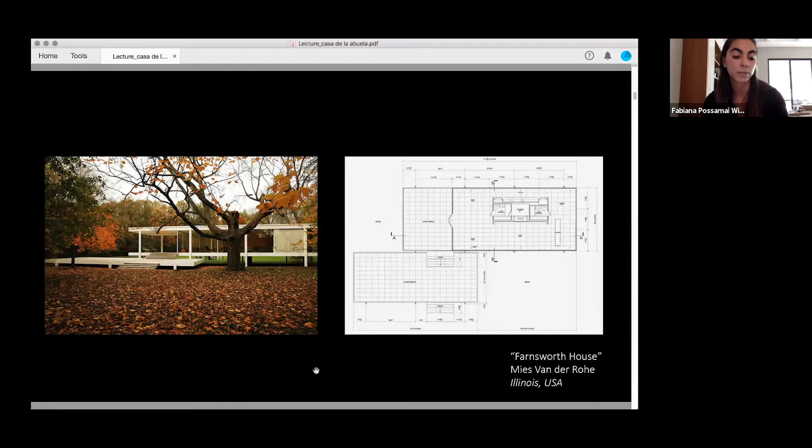This is something very particular to a house. It is very personal, and it requires a special understanding of the dynamics of the family, their friends, and even the rest of the community where they are inserted.

For architects, the concepts of house, home, and habitat are inevitably interconnected. They merge to cover a vast territory in which you can fit many different scales, solutions, and circumstances.

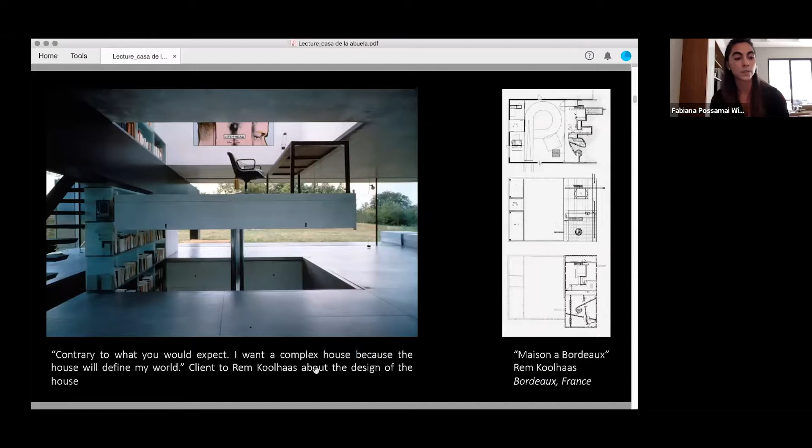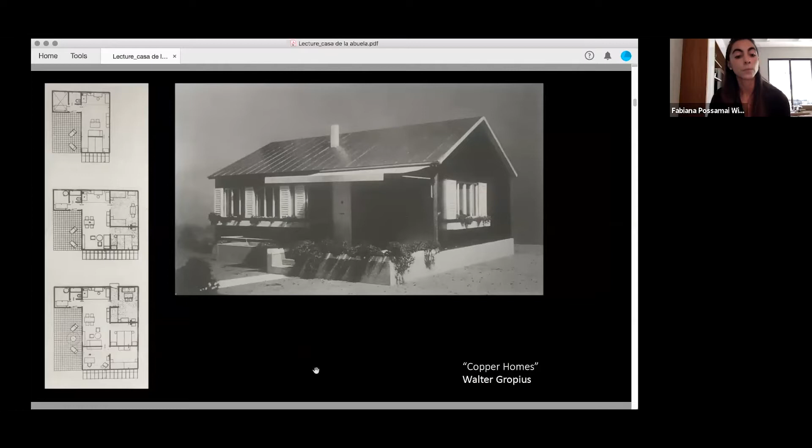For the non-architect population, the idea of the house has always been linked to a series of spaces, activities, and services: bedrooms, bathroom, kitchen, etc. Or even a predetermined image, more or less traditional, consisting of an enclosed volume with roof, windows, walls, and doors.

Depending on its cultural period, the house has a form, a materiality, a size, in the collective memory, and every non-architect recognizes without much thought what a house is, and therefore what it isn't.

In the architectural sphere, on the other hand, the house is not only an inhabitable building with a recognizable form, but it is also, in a real sense, and not only metaphorically, a safe place suited for life.

This brings me to Webster's second definition of house: a shelter or refuge, such as a nest or den of a wild animal. A natural covering, such as a test or shell that encloses and protects an animal or a colony of sorts. A building in which something is sheltered or stored.

That sensation of shelter and safety is a fundamental component of the collective idea of a house. But there are dualities at play that are present at all times. The house cannot be conceived as an enclosed fortress absorbed in itself.

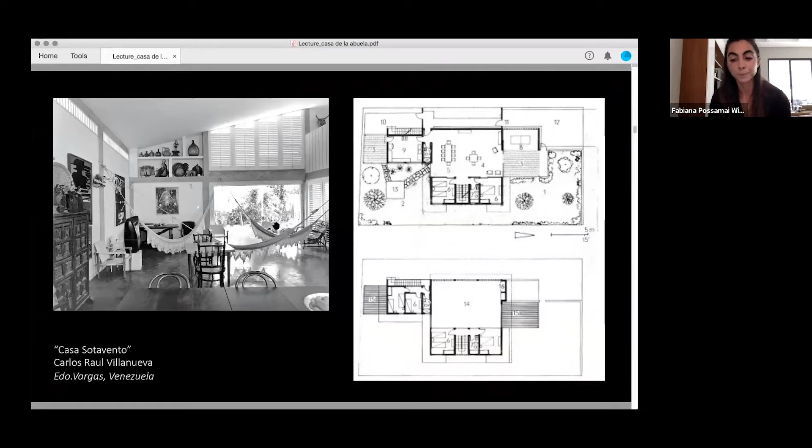The house was commissioned by my grandmother, who is originally from this region, so she understood well the conditions of the area. She grew up in a traditional colonial house with gable tile roofs and a patio, so this influenced the kind of house she envisioned to have.

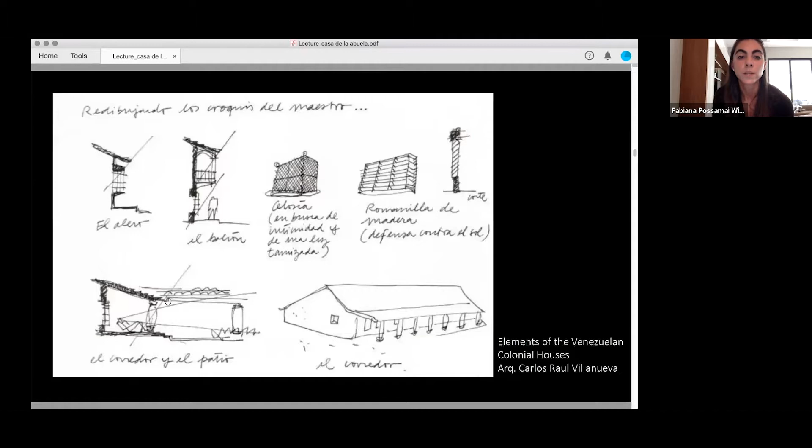This is, again, Carlos Raúl Villanueva with the Casa Sotavento, where we can see these relationships happen between the exterior and interior. So we see some of these components, even from the analysis he does from colonial architecture, translated later into one of his houses.

We can see how these values have been part of the exploration and study of many Venezuelan architects, and how they have achieved to produce spaces with these qualities.

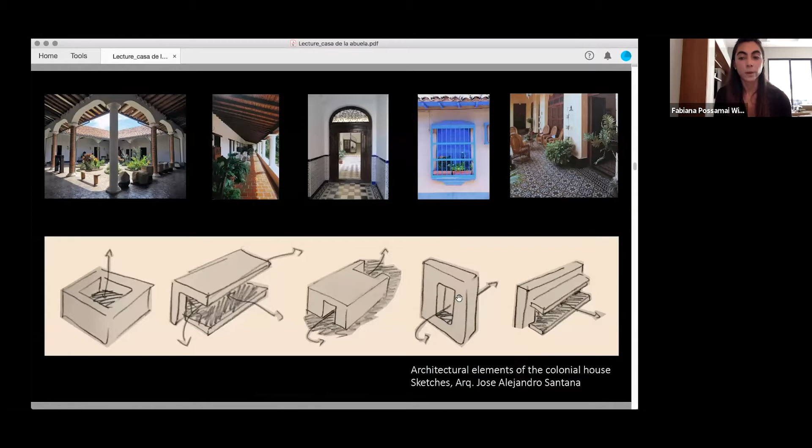After analyzing the colonial houses in Venezuela, we identified five types of traditional spaces that are constant and crucial in the composition of the space: the patio, the corridor, the zaguán or hallway, the window, and the porch. Each one of them is simultaneously a space, a form, and a place.

To design a house using colonial architectural elements, we initially experimented with placing the predetermined form of a perfect square on the site, which did not adapt or recognize the particularities of the lot and the place. This is the lot, and when we place the typical form of the square to generate that patio, it did not have much relationship with the existing lot and site.

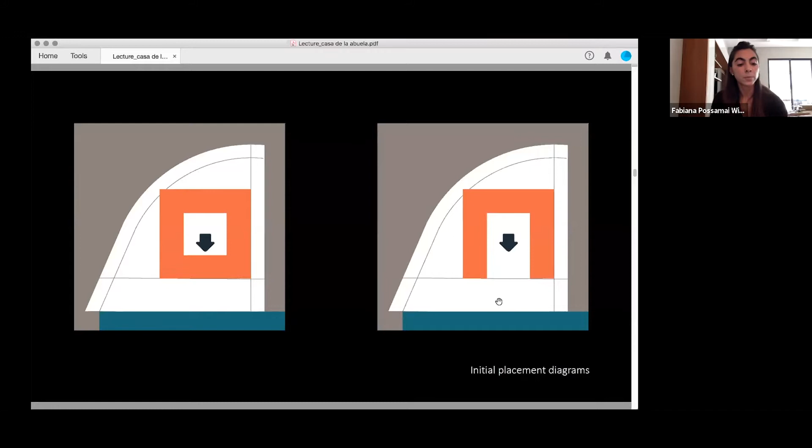We decided to open that square towards the water, and then immediately began to manipulate the essential form to adjust it to the circumstantial conditions of the site.

We arranged one of the sides of the square tangential to the curve of the lot, which allowed us to gain more area in order to meet the requirements of space that the client demanded. So this side shifted to adapt to this condition, and that allowed for this volume to be much larger.

As part of the request, we needed to solve the program on one story to facilitate movement throughout the house, since my grandmother knew she would not be able to climb stairs on her own as time went by.

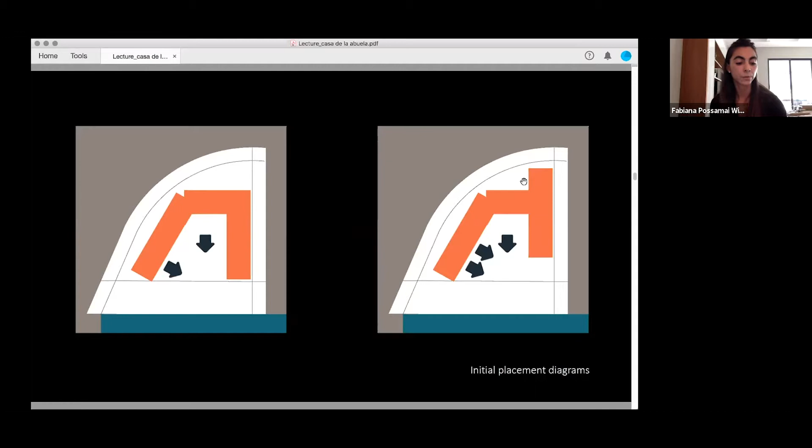This defined from the beginning the separation of the program into two very clear volumes, one for social and one for intimate areas, as we see here. This would be the social volume, and this is the one for the intimate areas. The two were linked together through a unifying roof that housed them all.

The development of the roof arose from repeating the strategy of the indigenous Shabono, which, with a single section extruded around a circle, forms in a single operation the entire building. So this is the Shabono, and as you can see, the building is basically formed by the entire roof, which is one single form, behaving as a single structure, wall and roof at the same time.

In this case, we apply that principle to a regular section, allowing the roof to act as an element that articulates the entire house, while the structure and walls adapt more freely, responding to particular aesthetic, functional, and local conditions. So you can see here the resemblance to that condition of the Shabono, having a unifying roof.

The Shabono is the collective housing of the Yanomami Aboriginal in the Venezuelan Amazon. It is composed of a ring that creates an inhabitable space. To the outside of the ring, it acts like a barrier from the vegetation and the wildlife. Towards the interior, it is an open and communal space that is covered and protected from the elements.

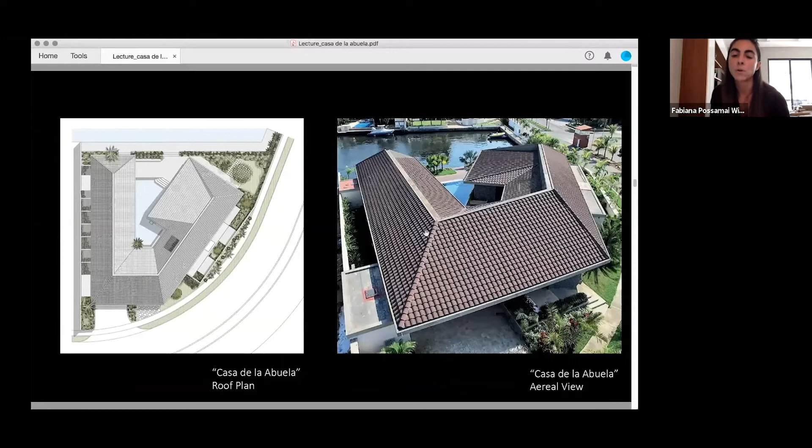is located, and reflecting the sky and the house itself onto the exterior. So we located the pool in the center where the patio was, and the pool was given by the resulting shape of the footprint of the house.

This presented at the beginning the challenge of how we would be able to build the pool on site. The thing is, in Venezuela, because we have seismic conditions, we have earthquakes, it was suggested that we poured the floor plate on a single solid slab, so we could give it a floating condition. And so in the case of an earthquake, we wouldn't have active breakage points on the slab.

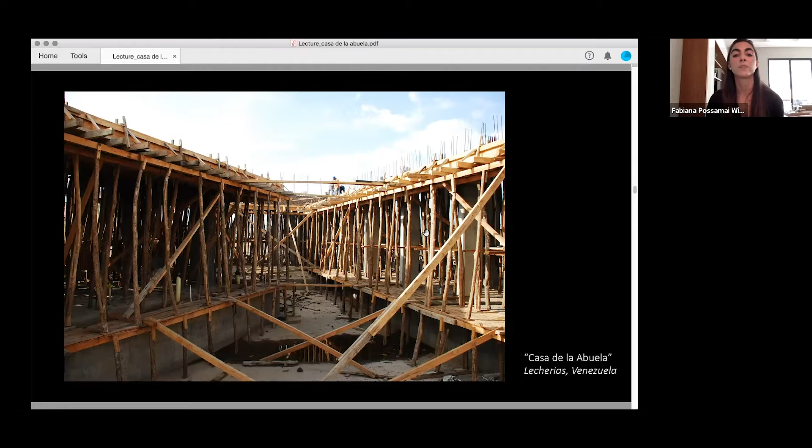But the pool could not be poured at the same time as the structural slab for the entire house. So actually it is very special that the pool acted as a symbolic element to interpret water as a morphing element of the place, but it was also a morphing element from the beginning in our construction site. The pool itself was cast from the beginning. It was the first piece that was cast and poured on the site. Here you see the site when it was empty, and the pool was, let's say, the originator piece for the entire house to be built.

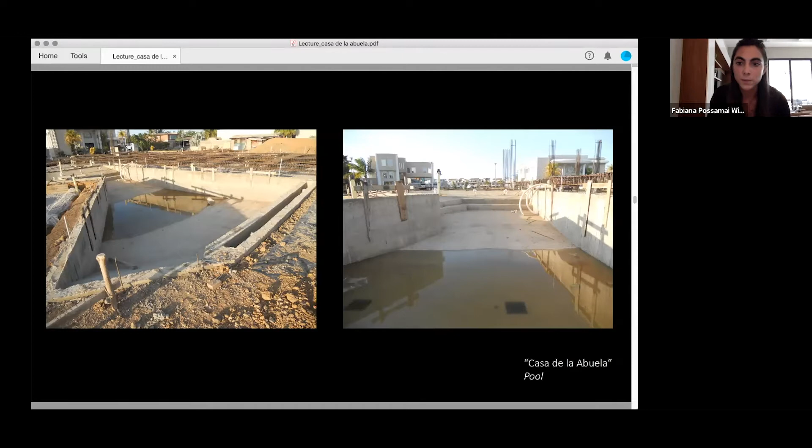This was mainly due to the fact that the slab had to have some joints in between them and the pool for it to act structurally and not break in the case of an earthquake. Here you can see some of the slab already being integrated into the site, and the pool was already finished.

Some of the images then show all of the work that goes on to build the slab, which is then placed around the pool as a resulting system. Here is very interesting because you can see all of that work being done in place as the process went by.

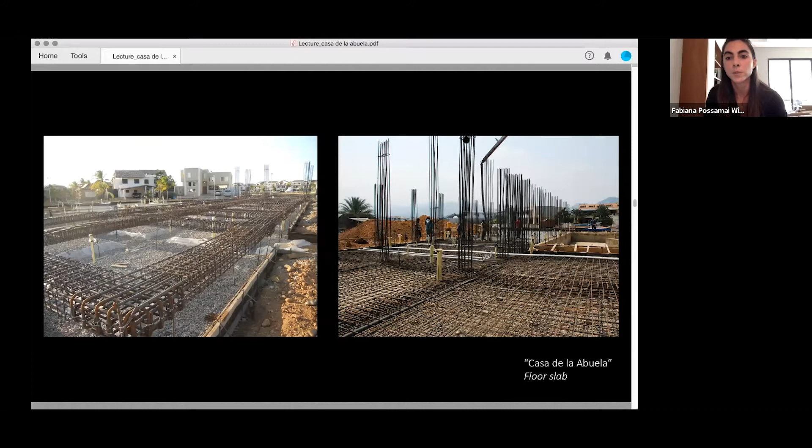All of the rebar that you have to set in place before you pour the concrete is what you see over here, so it would be possible afterwards to tie along the columns and the structural system to the existing slab. Since the slab needed to be poured in a single operation, or let's say on a single day, because of its condition of being a solid slab, we had to resort to bringing a full truck of concrete. It wasn't possible to just mix a piece, pour it, and then continue pouring in phases. So this was a full day's work.

We had a lot of personnel on site, and we were pouring the slab at the same time that there were people already leveling it out. It was a very interesting process to see because of the conditions of the area. It is very warm and very hot, a little bit like in Florida. The slab needed to be constantly watered so it wouldn't dry and crack before the concrete could set itself.

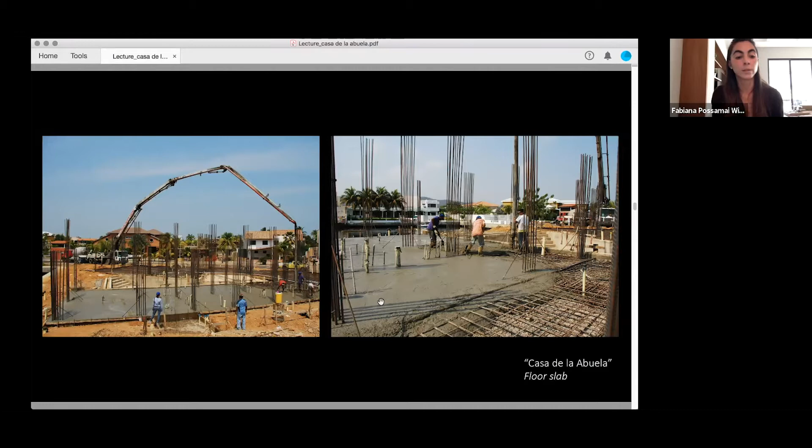Eventually, after that process was done, we could see how those columns begin to take form on top of the slab. Some of the columns, and I will explain later why this is, have a more specific detail, and some of them look a little bit more smooth. They don't have this detail. We will explain that in a little bit.

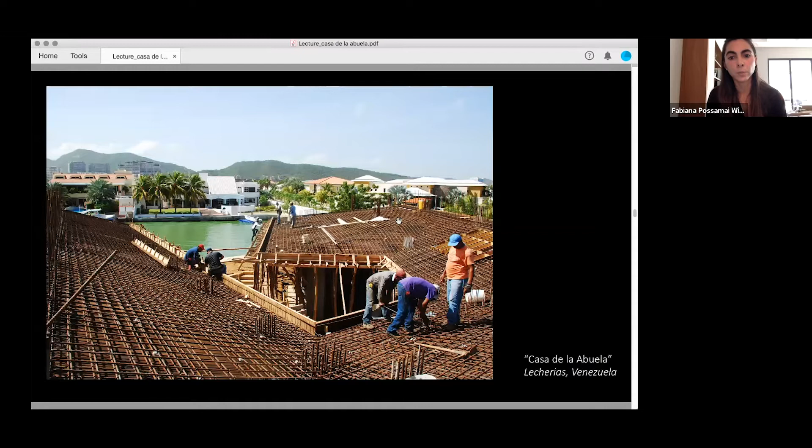And this is how it would look from the roof. Going back to the Shabono, it had that circle from the top, which emerged from that resulting form of the void or of the common space. Here is the same: the void is given by the resulting space of the patio, which in this case is taken by the pool.

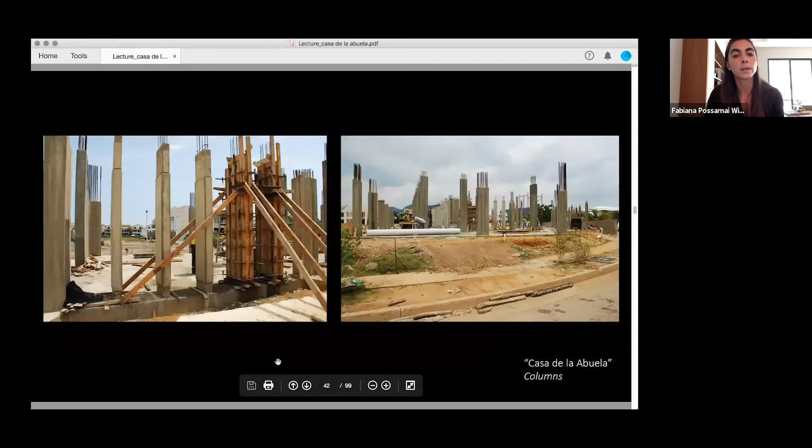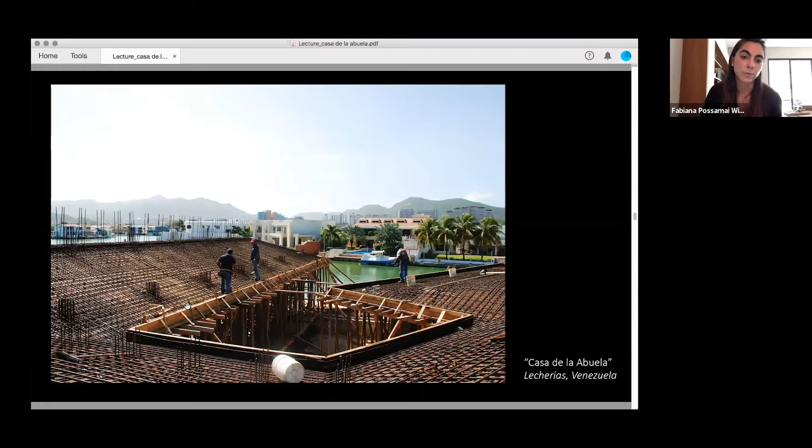So when you see the pool back in the image that we saw here, it kind of reflects the space that the roof leaves behind after hugging the entire house. This is part of the process to put together the roof as that resulting space. And some images.

After defining all of these elements, the resulting scheme allowed us to comply with the areas required for the program and solve it entirely on one story.

The house opens towards the canal to allow for the views. This is the lot, and we are on an interior canal, which only allowed us some views towards some hills on the back of the city, and then eventually towards the neighborhoods that are around and other canals.

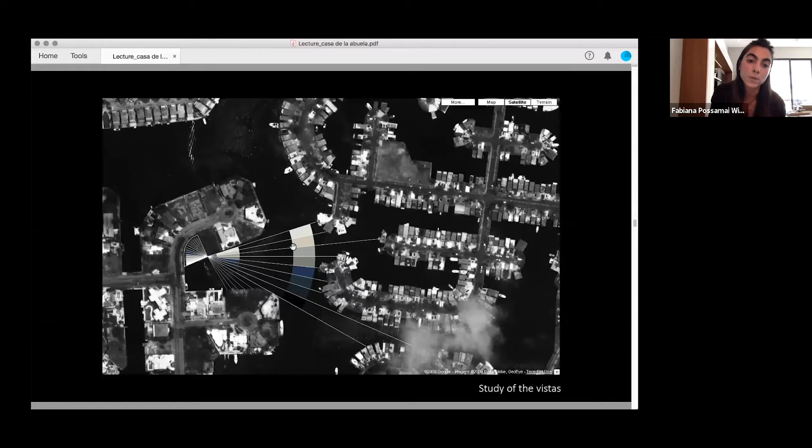So we realized after making this study that the most favorable views, the ones shown in this lighter color, towards these hills and towards where the canal opens, was the area that we wanted to set for the social spaces.

So the area for social activities is placed parallel to the street, to gain length and give these social spaces the best vistas, and project eventually this porch towards the garden and the canals.

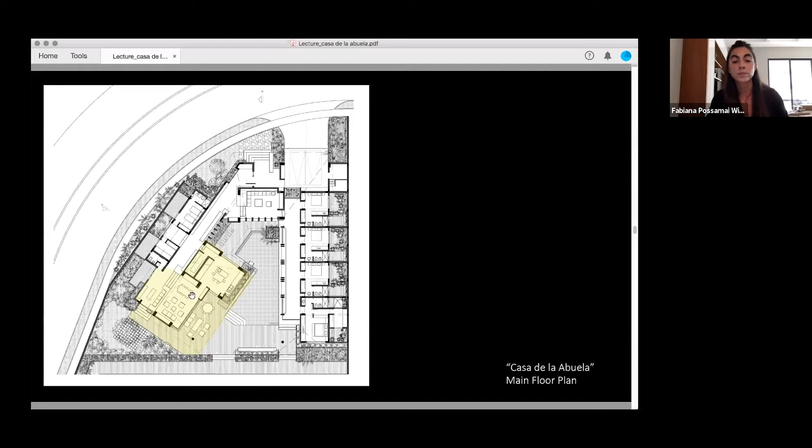So you can see here how that area is the one that is directly pointing, in the analysis, towards those hills. The porch is the place where my grandmother, in her daily activities, hosts friends. So this area of the house was very important for her, since this is an activity she does daily.

So the porch was located in the place of the lot with the best visual record of the daily activities of the waterways and the views.

All the social spaces enjoy the location that can participate to a greater degree in that particular life of the canals, marked by the motion of the boats that come and go throughout the day. It is very interesting to sit here throughout the day because you see all of the activity that goes on in the community. So it was very important for us to establish that connection from the beginning.

The bedrooms are located in a continuous volume to the east, parallel to the boundary, and having less possibility for interesting views of the surroundings, they face small side patios that act as landscapes of an intimate scale.

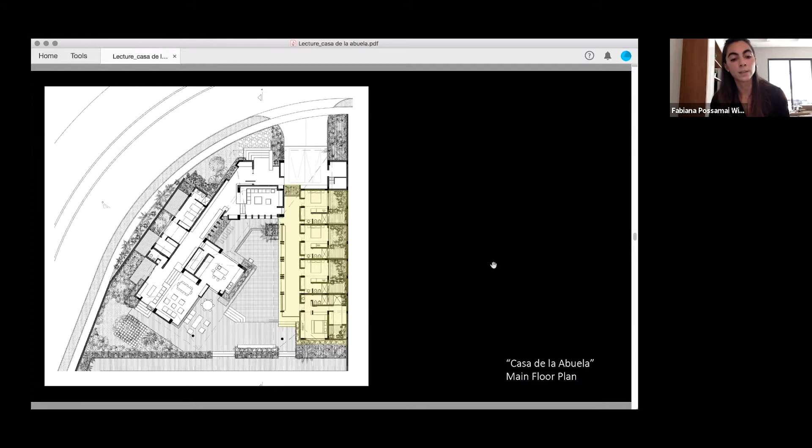Different from the other areas in the house, they are designed for rest and isolation. So initially we intended to have the bedrooms towards some patios, and originally these were conceived more open.

We knew from the beginning that the rooms were going to face a boundary wall. So we didn't like that condition so much, having bedrooms that, although we wanted to give them privacy, would have to face a wall.

So from the beginning, we conceived the idea of having small patios that were more intimate for each room. As we went along with the construction, we faced reality and the situation of insecurity in the area.

So the client pointed out that after we build the boundary wall, which has a certain height but is not completely or super tall, it would be like a small wall, we would still have the complication of people entering through the wall into the bedrooms, and that situation being very insecure.

So that's when the idea of the pergola came in. In a way, the pergola acts as a climate regulator or a light regulator element, but at the same time, it secured the space from the top, and it allowed those bedrooms to have a different quality within those patios.

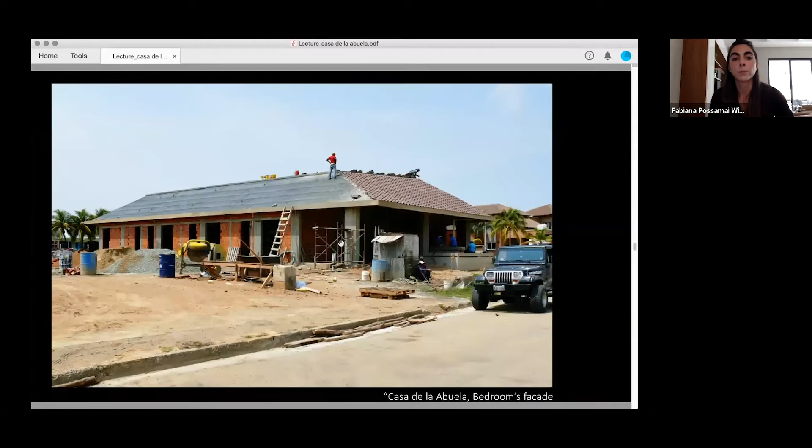So during the development of that facade, we were thinking a lot about the rhythm of the windows and the relationship with the exterior, but that ultimate decision of having the pergola is kind of the consequence of analyzing the realities of the site.

And for us, it was one of those good surprises, which eventually I want to point out: all of the things that we had to modify because of security circumstances of the area, or because of the local particularities, were actually to the benefit of the house.

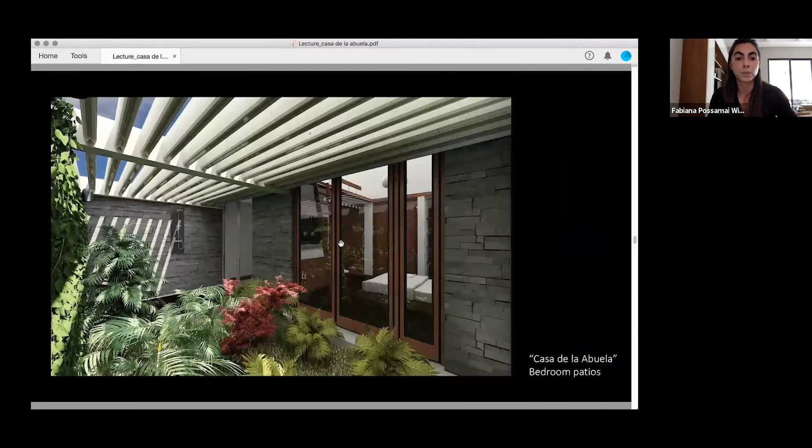Nothing that was eventually imposed on us because of the realities of Venezuela, and specifically the realities of this town, was ever a problem in the moment we had to face with these changes during the design process and construction. Eventually this rendered a better result, allowing for these patios to have a much better condition and the pergola.

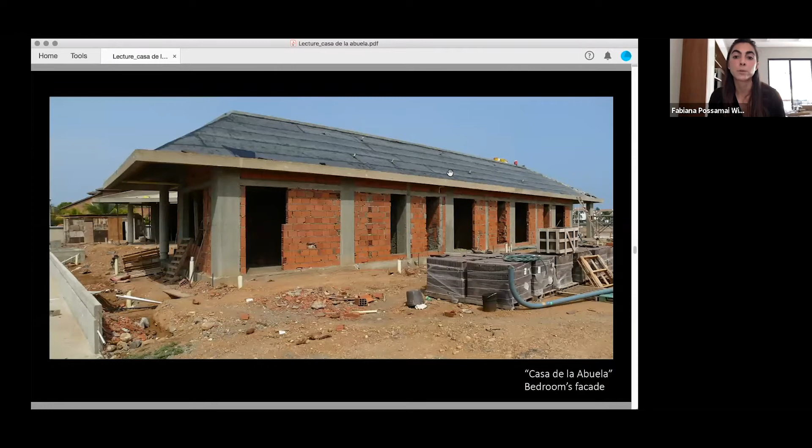And it allowed the client to have the security in this facade that he was intending to have. This is part of the process of building that facade, which right now you can perceive because you don't have the boundary wall. But it's curious that after that, it's a facade of the house you really don't perceive at all—it's something you live from the bedroom in a more intimate scale.

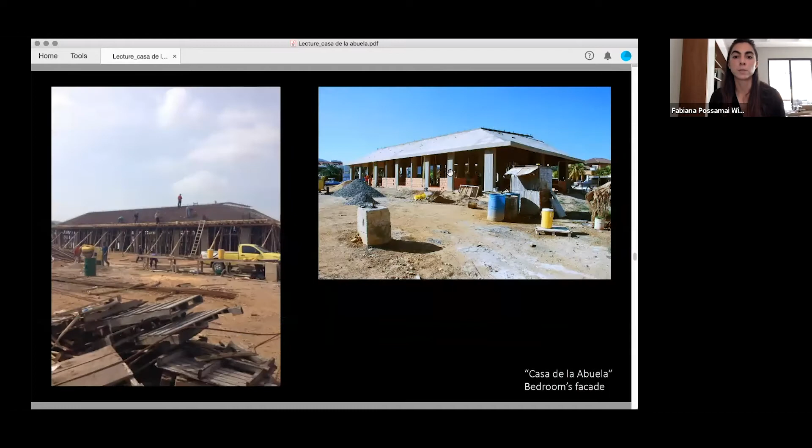On the other hand, the corridor serves as a connector, allowing movement between the bedrooms, and it is the space of intermediation between them and the central patio. This corridor on the other facade for the volume of bedrooms also had a very particular situation in terms of security. The canals are to the front, or south, of the site.

The security problem was that this corridor was completely open. We always wanted to recreate that colonial corridor and establish that relationship with the outside—we imagined people coming out of their bedrooms and jumping into the pool. So it was very hard for us when the client said the corridor needed to be closed, because anyone could come on a boat from the canals and enter the most intimate or private areas of the house, which were the bedrooms. That was a security problem we had not thought of when we designed the house.

At first, when we thought of closing the corridor, it was like, okay, we lost the space. A corridor that is enclosed is not really a corridor—it's just going to be circulation space, and it's not going to have the spatial qualities we were trying to recreate from the colonial architecture.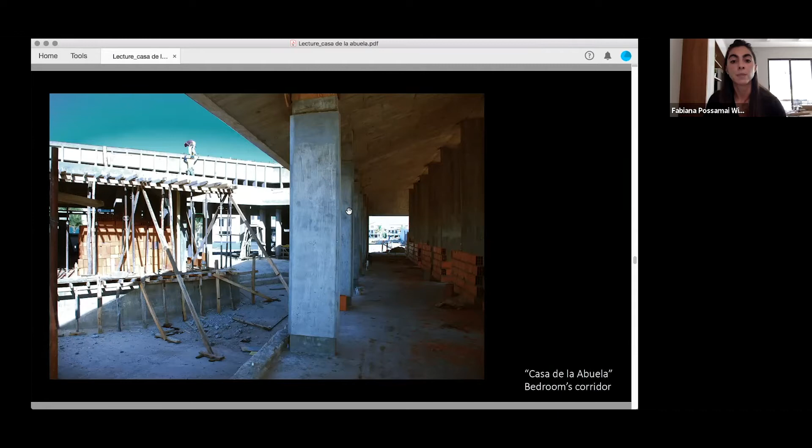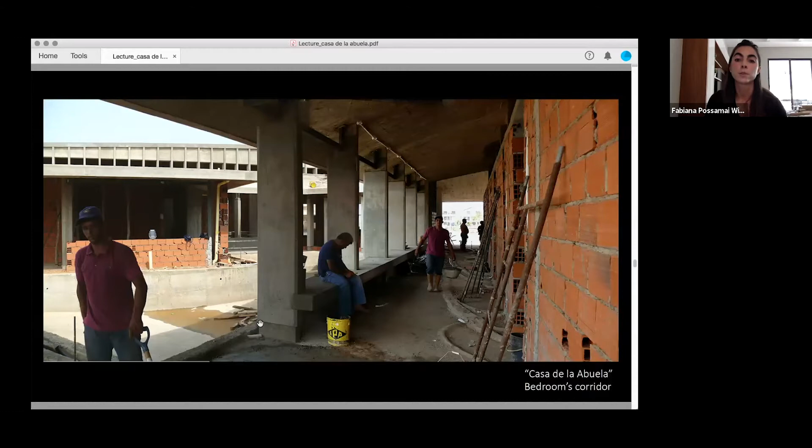But then again, these constraints became an opportunity to rethink the space and redesign it, and this is when we thought of including a low bench. It seems like a very simple operation, but the low bench allowed us to establish an enclosed relationship for the corridor, thought of with the same spatial qualities that could live towards the outside areas.

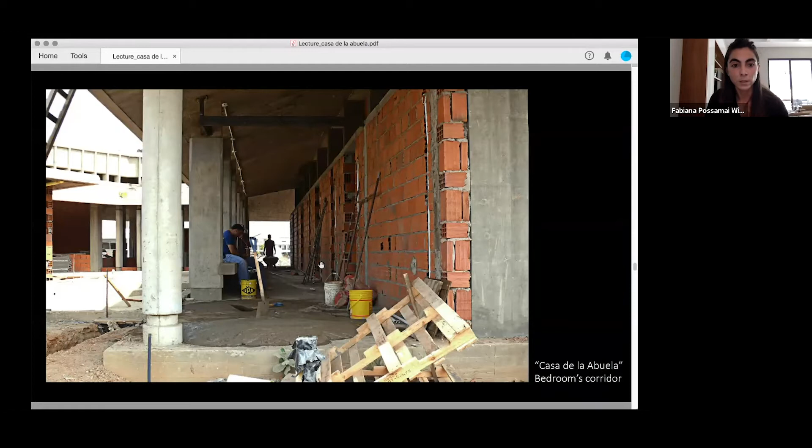And eventually you could allow the corridor to still have relationships with the outside, but at the same time it would allow us to rethink the possibility of having elements that would close in between one column and the other.

This area was always thought of as a space that would live towards the pool and could also be used to sleep in hammocks. So we wanted to extend the intimate activity of the bedrooms to that intermediate area, for people to gather and socialize in a different way in this space.

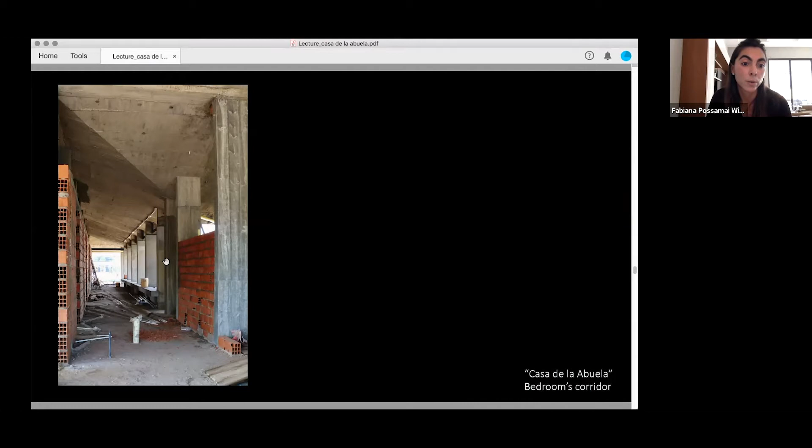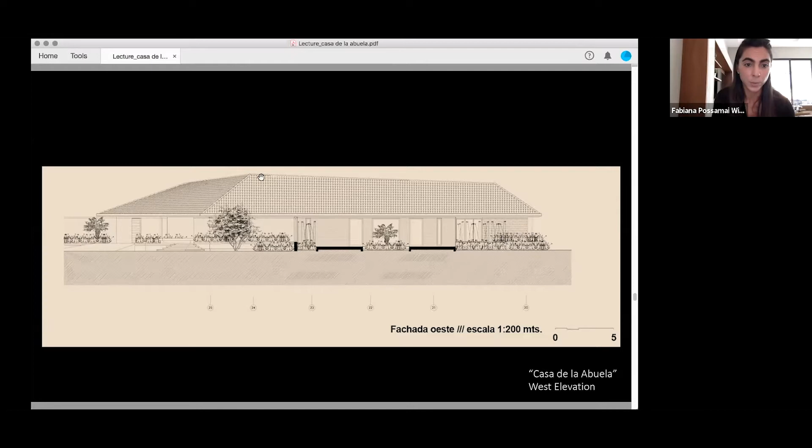This is this point over here, and as you remember, the zaguán, which is the entryway or hallway of the house, was marked by the fact that the roof elevated itself there.

We initially intended to have that high point on the roof, not only to mark the entrance of the house, but it was our opportunity to explore with a more contemporary language within the traditional form of the tiled roof.

But this presented a lot of challenges and a lot of study of geometries. There were a series of studies that we had to do first in the office through 3D rendering and 3D programming to allow for us to understand that condition of the double curvature, while the canal preserved the 2 points in the canal for the roof preserved the same point in the z-axis or on their height.

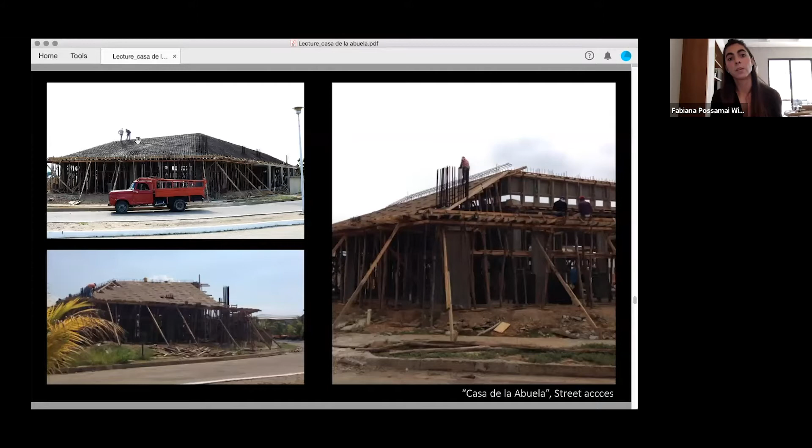It was constantly changing on the highest ridge of the roof, and therefore it was a challenge constructively, and it was also a defining point because it forced us to ask ourselves, well, how much is too much? At what point will the roof not allow us to go up anymore? And how is the space going to absorb this difference in height?

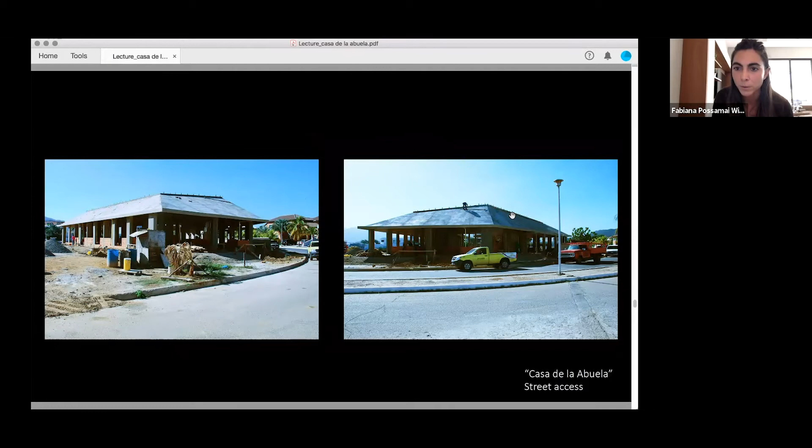So these are some of the images of the roof after it was poured, and you can see very slightly the surface and the double curvature and the effect that generates towards the street when you approach it. It's kind of like if the roof was read mostly from the other facade.

You can read it, yes, you can read it better from this facade.

I also want to point out here, because you can see some of the images of the exterior, that facing the materials for this entry point of the house was also something that we had to address with local materials. The conditions on the site being a little bit like Florida, humid and warm, the client wanted to avoid as much paint on the exterior of the house as possible, because it's a lot of maintenance, and every 5 years you need to repaint. The area, fortunately, has a lot of stone cover.

We explored a lot with some of the local stones. The one that is most prominent is a reddish kind of yellow stone in the area. At the beginning we wanted to use that one, but then we stayed away from it because the roof is already red. So we eventually ended up using this material that gives this finish to some of the exteriors of the house.

On the interior of the zaguán, this space articulates the intimate and the social spheres of the house, and is also a place to receive guests on a less formal occasion.

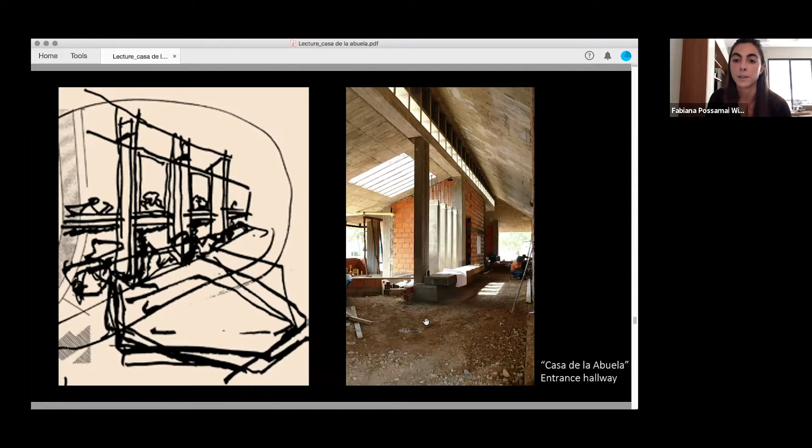So this is that interior space that I'm talking about, and this is that hallway that we call the zaguán. We wanted to achieve those light qualities because it has the maximum height of the house, as we showed on the exterior, and then we took advantage of that being the linking point in between the two volumes of the house to allow as much light to come in different directions.

You can see that hallway here. We repeated the operation with the bench towards the exterior to define the spaces and to allow or give an opportunity of the space to gain life and to have its own activity within the house.

And these are some views of that interior, which is the highest point of the house. And you can perceive, we have a person here, a little bit of the scale of that high point of the roof, how that kind of translates into the interior space, and how that allows for this opportunity of capturing the light through the windows and eventually through the roof to happen in one single space.

Usually when you see the colonial zaguán, it's a very dark space that takes you from one area of the house to the other, but in this case, it's a very illuminated result.

It is important to point out that the time of production of this house has been immersed in economic, political, and social crisis. This crisis has affected the professional practice of architects, not only in the conception of new projects, but in the scarcity of materials for construction and personnel, amongst other challenges.

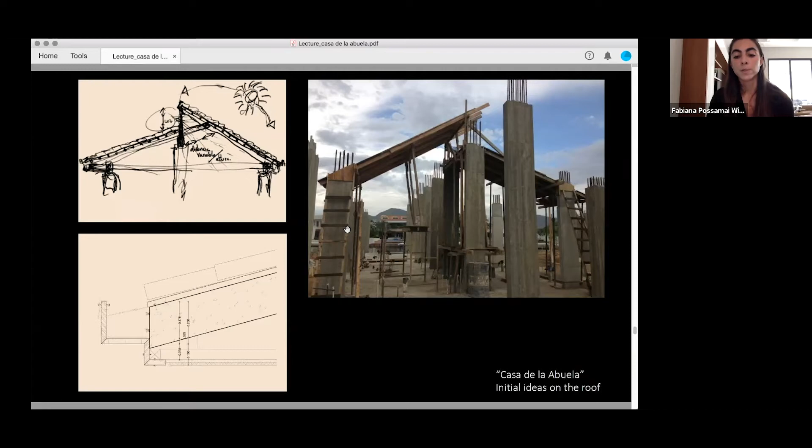We ended up using concrete, as I said. This readily available, rough and strong material, monumental but simple at the same time, required us to reconcile its nature with the architectural intentions that arose from the design strategy. Because we originally intended for it to be wood and then had to switch materials, we needed to adjust a lot during construction time to achieve the same quality of space and all of the intentions we had from the beginning. The use of reinforced concrete made possible the materialization of the concepts we had intended for the design, while honoring the emblematic material and showing its tectonic qualities.

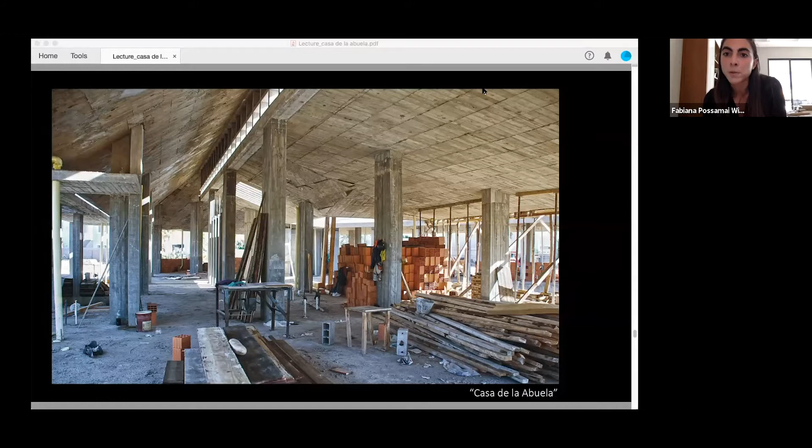You can see in some of these spaces how you see the detail in the material that we use to cast the concrete, and the richness of the space that is kind of allowed or still configured by the use of this material.

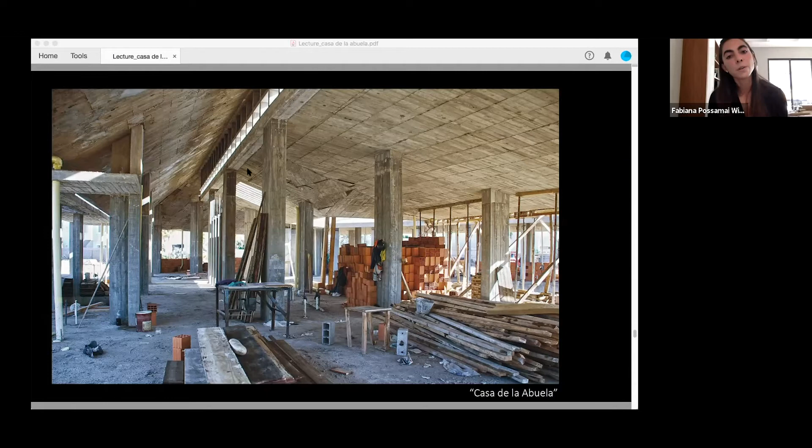For us, it was also, like I said when I was talking about the corridor and the circumstances we had with the security issues, a happy surprise to switch materials, even though we intended at the beginning to have a lot of wood details and things designed and translated or given to a carpenter to design a lot of the details and give richness to the quality of space.

The simplicity of the concrete eventually resolved the space in a much simpler way, and it allowed for maybe light and space itself to really be protagonistic, which I think was a much better result at the end.

The second challenge we faced as a result of the crisis is more related to the means and methods of construction of the house. There are local means of transportation and manufacturing, some materials available instead of others, a labor force with certain qualifications, and budgetary limitations that constantly force us as architects to rethink what Louis Kahn called the how.

We should not assume a position where everything must stick to the will of what is desired and imagined. We needed to stay flexible, and we needed to remain true to our design intentions and ideals while considering the aspects of the local reality. Otherwise, we would undermine the possibilities of the creation of the house, which is ultimately a necessity and the goal for the client and convenient for us as professionals.

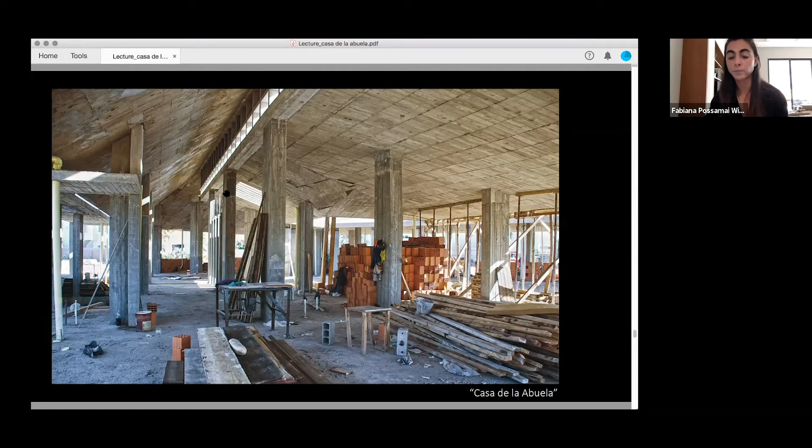Also, we needed to stay flexible because even though there must be a relationship between materiality and the expression of the architectural ideas, it is also true that there is no single way and no one material to express an idea of architecture. I think this is very important.

As you can see, when I was talking before about the quality of the space, being fixed to what you design in the office and having those ideas manifest in universal reality is something that sometimes distances you from the possibilities that opening your mind and receiving new feedback from the opportunities given to you from the site. Like we said, the local constraints eventually result in a much better resolution than what happened to us in Casa de la Abuela.

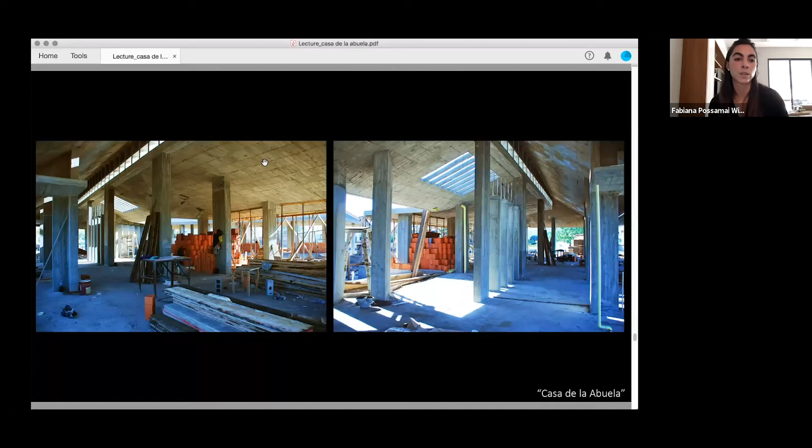So here you see some of the interior images, again, of that roof, cast and poured in concrete, and how the structure, the naked structure, like you see in these images, already speaks of the space and the qualities inside the house. Here we have a page that shows that.

The structure of the house was originally thought of as a common portico structure of beams and columns. But the early calculations suggested that the beams could disappear and the roof made of a solid slab that rested directly on the columns.

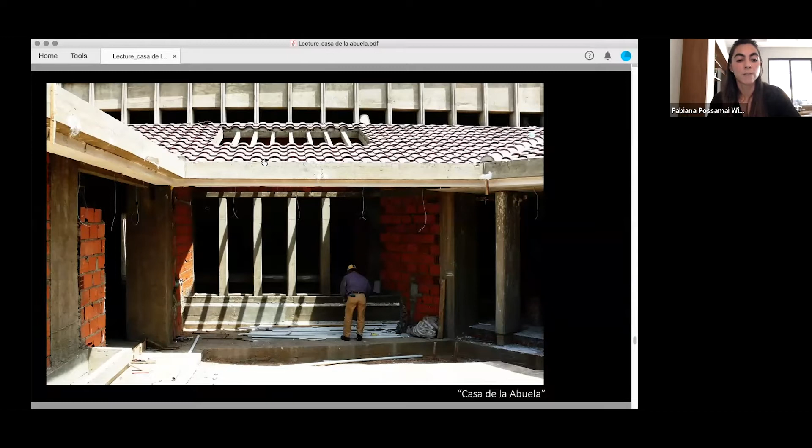The difficulty we faced then was how to resolve the gap at the top between the two sloping roof surfaces, which allows light to enter the internal spaces. So this gap over here that we constantly see in the roof is what we're talking about.

We did not find it convenient to support the upper roof plane by extending the columns, because they would appear to interrupt the span with its variable sections and rhythms along the roof. We then proposed a solution: elements we call structural parasols.

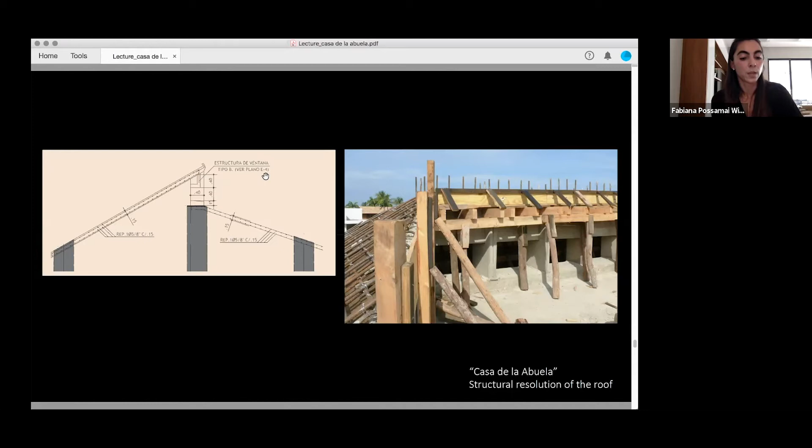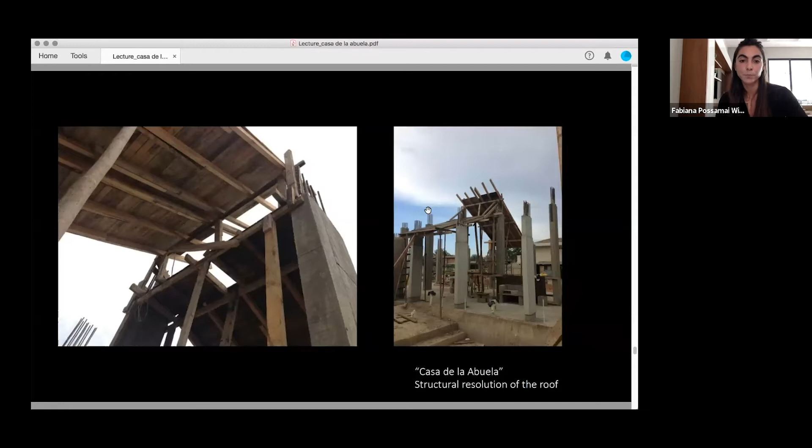In addition to fulfilling the supporting function of linking both roof surfaces, the parasols allow direct light to enter the interior, since the windows were usually protected under the porch and wide corridors, and light was not able to reach some of the more interior spaces of the house. Here are some images of that gap, and the structural parasols we designed to occupy that space and resolve that joint.

The structural parasols are made up of pieces prefabricated on site, and together they work as a truss that runs through the entire ceiling, articulating the two canopies.

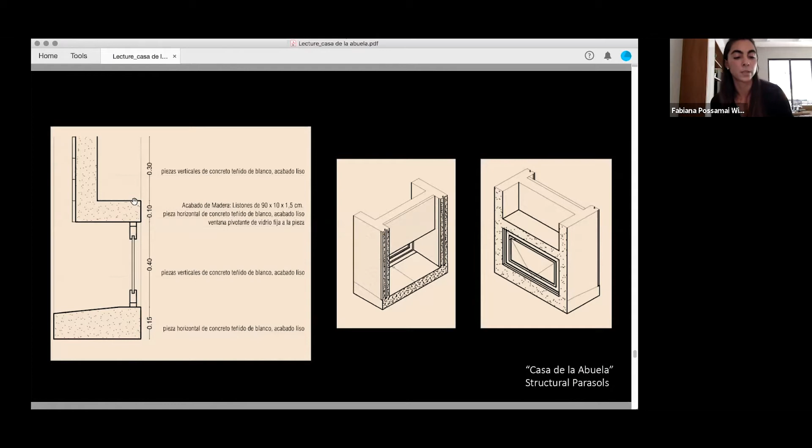As you can see here, we proceeded to pour the elements directly on the first slope of the canopy. We initially thought we'd be able to cast them on the ground to the side and then place each one individually, but because we had to resolve the differences in height of the top slope, which was constantly changing along that Z-axis, we treated the parasols as an uninterrupted beam.

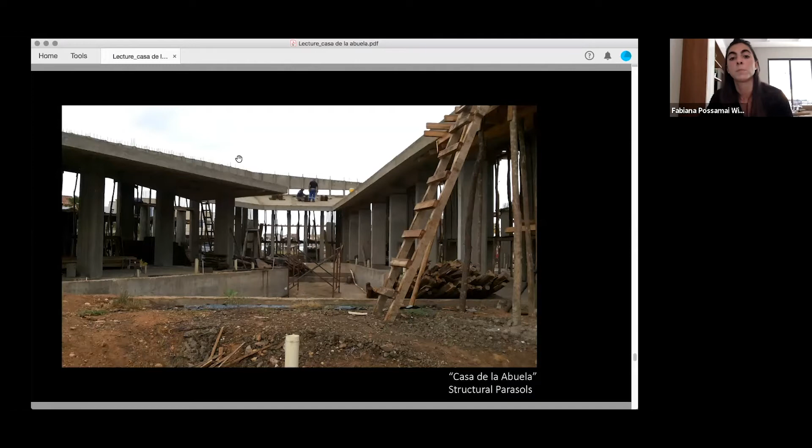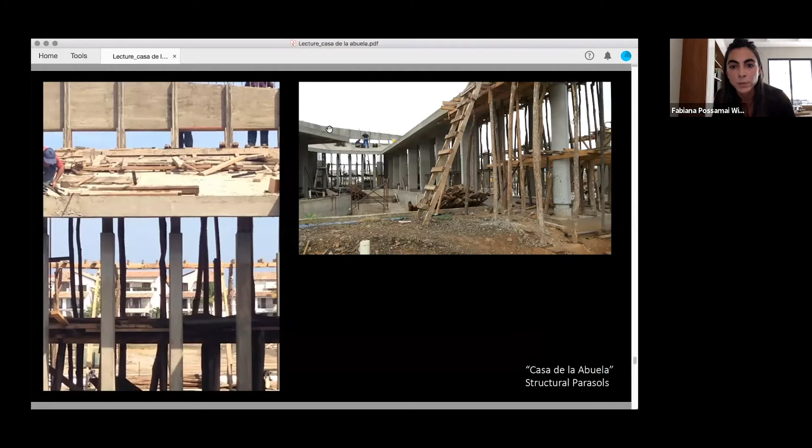So we cast them on top of the first slope and then assigned that Z-axis, which you can see a bit here, with the highest point shown in this image, and then proceeded to cast the parasols in place.

In the interior you can see that beam condition, and how they rest directly on the columns, without that beam component appearing on the rest of the roof.

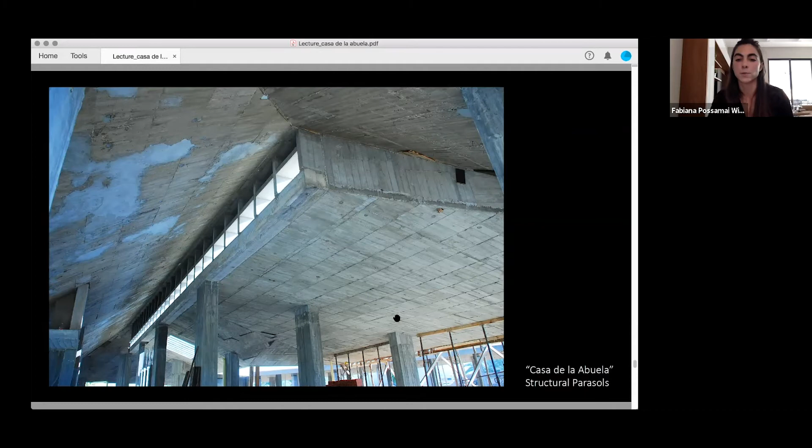The design of the structural parasols evolved along with the house on site, changing many times to accommodate the realities of construction. These are some images showing how the parasol developed and how we changed them on site many times.

At the beginning, the window absorbed the difference in heights, but we realized that would be very expensive, producing custom windows throughout the entire roof. So we decided to use a smaller gap with a prefabricated window, allowing light to enter while letting the concrete absorb the height differences between the slopes.

This is how the light comes into the interior. It wasn't a significant change, and it allowed the client a great reduction in the cost of producing those windows, while we still achieved the light quality inside the space that we were looking for.

This is the parasol once finished. We decided to use some of the synthetic wood elements we used for the pier on the parasols too. As we said at the beginning, since we intended the roof to be wood, we thought of having many details and elements of wood designed by carpenters for the roof.

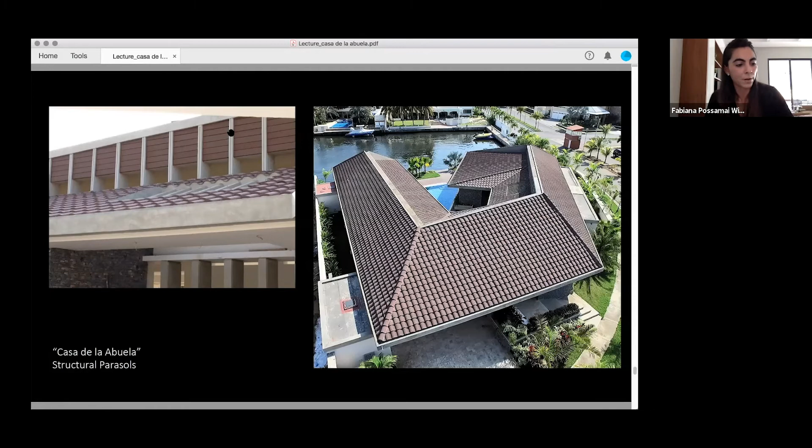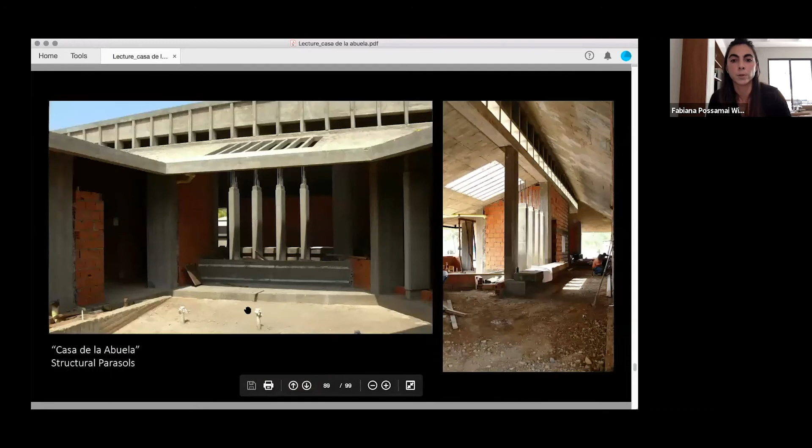In the bedroom area, going back to that structural system with the rhythm of columns on the inside of the house, the bedrooms have a regular and repetitive column modulation forming a bay of approximately 9 by 13. Although it's a small bay, it was defined by the dimensions of the space.

It was also given by the use of 8-inch columns, which is not common — normally the minimum column side is 12 inches. But we decided to change them into longer, thinner columns so they would have visual continuity with the masonry walls of the rest of the house.

That operation allowed us to have smooth surfaces along the interior spaces, not only in the bedrooms but throughout the rest of the house. In the social areas, although there is continuity and rhythm as in the bedrooms, the structural organization is less regular, because we needed to adapt to the variable forms of the space.

But you can also see how the columns respond to the same logic, and they end up giving the appearance of load-bearing walls, a little bit like Wright Usonian houses on the interior. So the columns were the only elements that were visual on the corridor, on the bedrooms, and on the porch, because the columns were the ones defining these spaces.

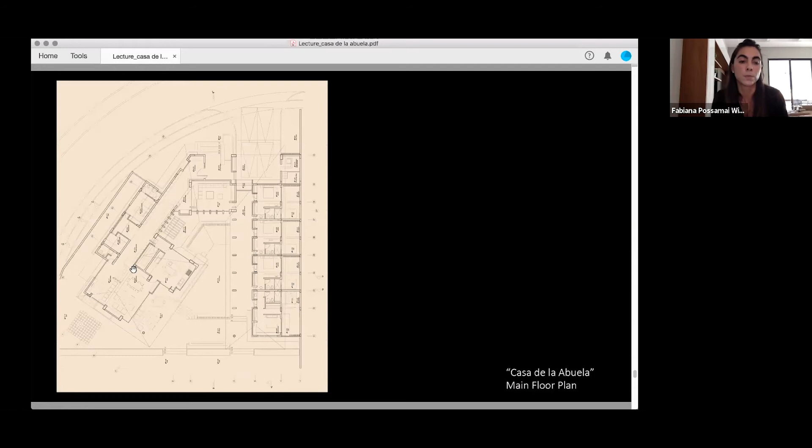That was ultimately very important as well, because it was part of maintaining that colonial language on the areas or spaces that really require that language to construct the space itself. But the interior of the house absorbed some of that, and the intention was to have smooth spaces without beams interrupting them, so we wanted the columns to stay embedded within the space.

I'm going to show you very quickly, or walk you through the spaces, but I'm going to play a video that shows a little promenade through the house, so you can feel how these interiors are lived, and how the structure is very present within the house while still responding to this constructive language with the masonry walls.